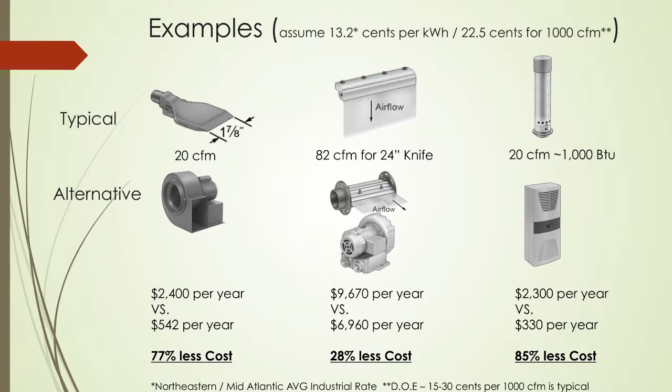Just as a couple notes, the energy rates are based on the Northeast Mid-Atlantic industrial average for electricity, and we found it in a DOE guideline, 15 to 30 cents cost for 1,000 CFM of compressed air. It's very hard to actually find the real cost of compressed air, so there's a range you can use to do the math. We picked the middle of the range from the DOE documents we found.

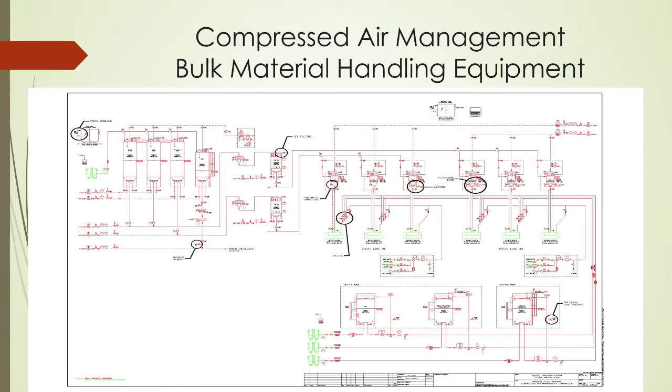This is a schematic of a two-plant bulk system using pneumatic devices for fluidizing beds, valves, jet filters. There are options for mechanical devices, vibratory, impact without air, mechanical filter cleaning, jet filter, bearing purges, pneumatic vibrators, airline blow cleaning.

What we really want to speak to here, you have options when you buy the equipment up front. It goes for any equipment. As you think through it, this is a bulk handling system for a 2-line bakery, 4 silos, 2 use bins, 6 scale use points. If you do your software differently to be more efficient in the air devices you have, if you make some decisions to do a vibratory bottom instead of a fluidizing bed using compressed air...

We came up with savings of $9,000 a year on an equipment increase of about $7,500 to $10,000 a year. Not a huge amount, but go back to my original point. That's a lot of compressed air that you didn't add to the plant, which may also avoid more compressors being needed long term. Again, the other side is application specific. Depending on the materials you're moving, what's really feasible versus that cost also has to be considered, but remember the buildup effect over time. Every pneumatic device you have in the future becomes a place to become a leak.

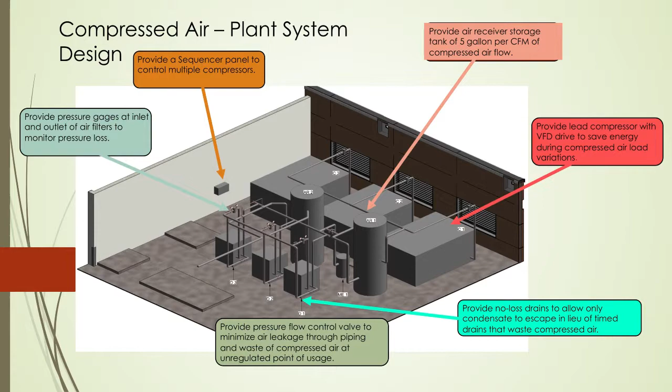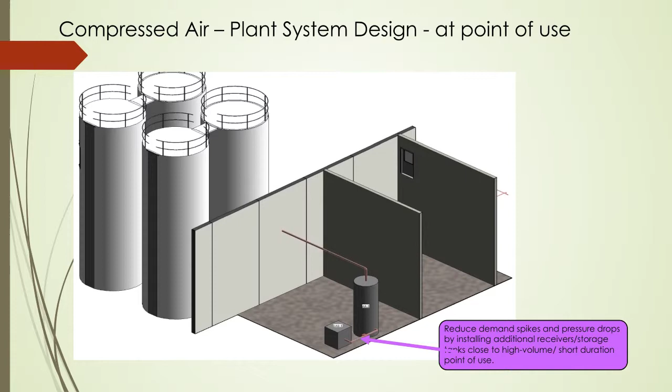Sequencer panel, this is your controls, this is the brains. Spend the money on the brains to make sure everything sequences properly and you don't waste cycles. Pressure gauges throughout to make sure your filters and everything's running efficiently, and make corrective actions before you start losing efficiency. Flow control valves to minimize leakages. Out in the field, you can reduce the impact of spikes in field devices by having additional receiver tanks out in the field.

So those are some examples of things you can think about as you're supplying equipment into new bakeries and existing bakeries to help customers reduce energy costs.

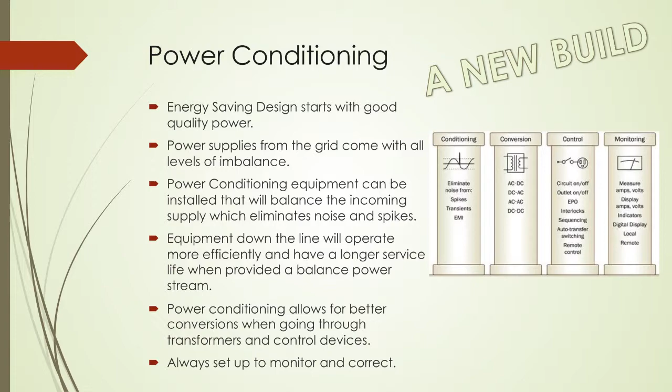So back to power conditioning. Obviously, power conditioning allows you to have a balanced use of the utility. It helps your equipment down the line operate more efficiently. Motors and drives will tend to last longer because you're not spiking them, you're not changing the phase to them. And even your transformers - getting a good balanced power feed to your transformers will save money on the electric bill.

Talked a little bit about sub-metering. Very simple process. Normally, if you think about your house, you've got your meter outside for gas or electric, and we have that in the industry as well. But when you come inside the house, this is putting a sub-meter at your oven, at your boiler, at your refrigeration system - key places throughout it.

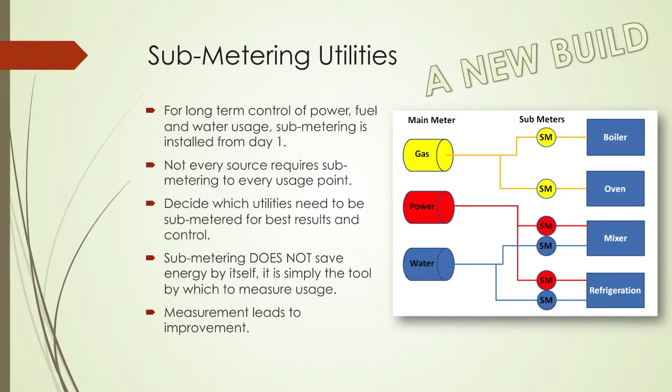I'm actually currently executing on 2 projects at two of our major bakeries where we're sub-metering the whole plant in all the key places where this makes a difference. So we do see an ROI in it, and we hope that comes through. Obviously, as you supply equipment, if you can think about sub-metering as part of the deal, it takes a little bit of load off the supplier. It may also cause a differentiation between your offering and someone else's when you come forward with these ideas. So think about sub-metering when you're selling a big piece.

This is one we've talked about for years - VFDs. If I was going to ask any of you for a proposal on a large machine, 9 times out of 10 we'll see the VFD for a 100-horse motor or something like that shown in the options. I think it would be helpful to bakers if that was laid into the top line, and if somebody looking at your system doesn't want the VFD, let them option out. Optioning VFDs into your proposals, I believe right now for bakers is a key piece. Not only does it get more life out of your machines, but it also saves energy back at the bakery.

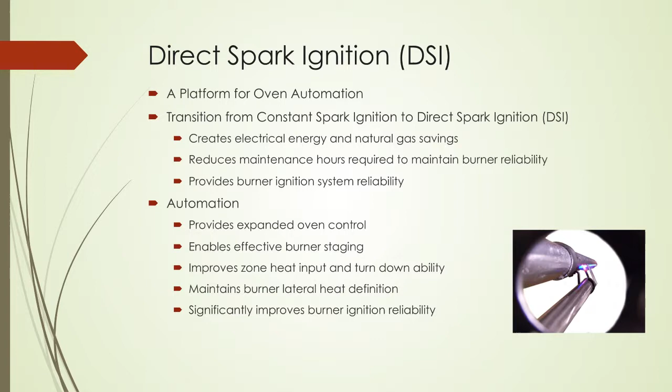Many of you are involved with providing those goods and services to us, but what DSI does for you, I wouldn't say it revolutionizes your oven, but it sure makes it a lot better, because it gives you savings not only on the electrical side, but on the gas side also.

As you see, basically on the older generation ovens, you had an igniter that sat there and fired the whole time. It was constant, and it didn't pulse - it was not on and off, and that electricity was being used continuously. Basically with DSI, it's on, off, or basically on demand.

Now, the other big area, and really the large savings area that you can realize with adding DSI to your oven, is the use or the savings of gas.

The older generation ovens, basically without DSI, if the burner was lit when you walked by and you looked in there and said, oh, it's good, you may go on about your business and it might go out. If it went out, you're just sitting there pumping gas right into your oven. It's going up the stack. So DSI basically does away with that.

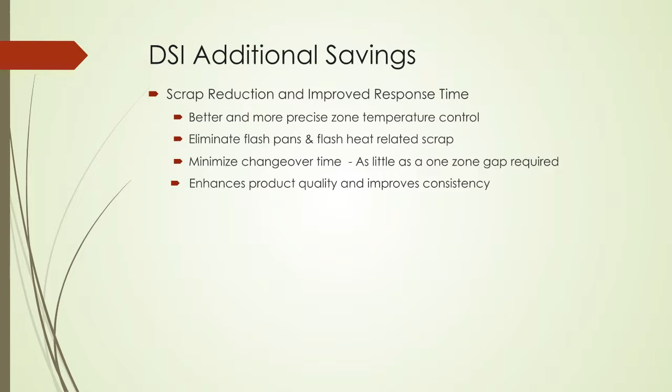This slide right here is probably the most important to the baker. The things that this slide really talks about is the end product - the actual savings from product, because that's where the rubber really hits the road. When it gets down to the wrapping department, you need to have good bread. You need it all to be the same color. You need the wrapping department to be able to handle it, and it needs to be very, very consistent.

Whenever you're dealing with an older generation oven, you have an issue of buildup in certain zones of heat and the bread flashes, that bread burns. Then you got another situation where you don't have enough heat in the zone and the bread gets soft. So it was a constant nightmare of trying to figure out the gaps and how to open the dampers, close the dampers. There was always a problem. DSI really has eliminated that issue for us, and it's made it easy for the baker.

The next area I'm going to talk about is actually a bit of a way to create some payback for yourself. We do this more now - we do this in all of our new installations. Jeff mentioned it. It's basically how do you recover some of those costs with the new ovens you put in.

If you're relocating the oven, it gives you also the opportunity. Of course, there's 2 or 3 different ways to do it - probably a lot of different ways to do it. The way we're employing is basically we take the heat that's being exhausted from the oven and we capture it in the stack, and we do it two different ways. One way is basically preheating air, and you're using that warm air to go into your ignition system or using it in different locations in the bakery.

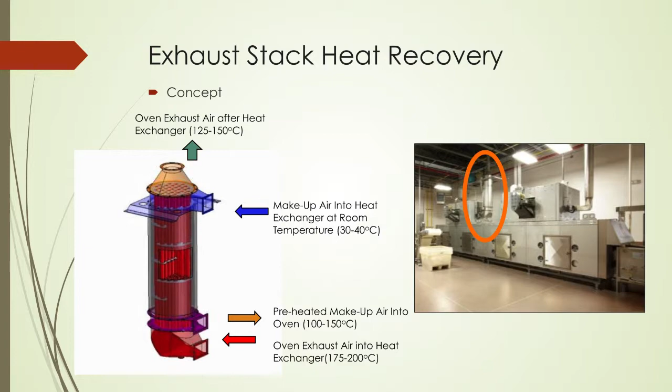The other way, and this is the predominant way we're going right now, is we use a double wall pipe on our stacks. We put a glycol coil inside, in between the two, and then we transfer the heat to the glycol, and then we use it in a number of different locations. Mainly we use it for water right now - we preheat for our boilers, we preheat for our proofer.

We no longer have the big 150 horse boilers, two of them, in our bakeries anymore. We preheat - we actually generate our own hot water. Then most or all of our new proofers are electric, and so we use the coils off the glycol, and again, many different areas that we use this water. This unit right here is actually in construction - that is our Oxford, Pennsylvania location.

And of course, the last thing these guys mentioned - right now many of you know I've been kind of hanging out in California a lot, and I've learned a whole lot about greenhouse gas. When you can clean your airstream up, however you do it, but mainly by doing recovery, you sure do reduce that greenhouse gas. There's just so many good things with the green initiatives that you get into - if you drill down in it, don't expect the paybacks to be 3 years. Paybacks are not - you're looking at 10 years, or hopefully less. But you've got to do them to stay around.